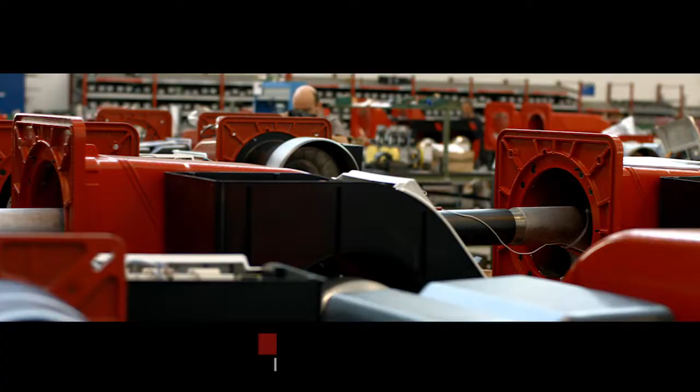Claudio Pancolini, and I founded this company in 1972 with a deep commitment to develop and produce high-efficiency burners with a low environmental impact, using gas as fuel.

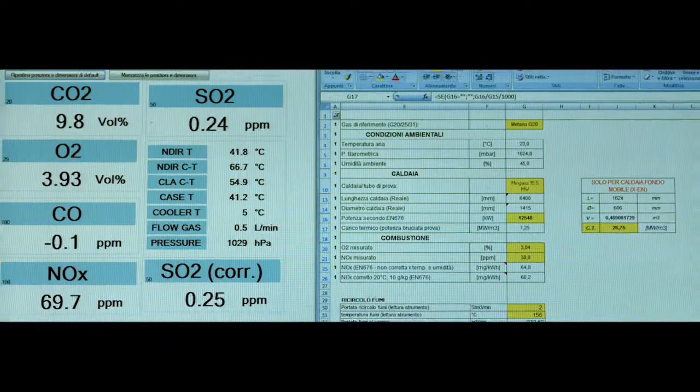After almost 50 years, many things have changed, namely the technologies and the technical solutions, but the will to discover new systems to improve the production of burners remains.

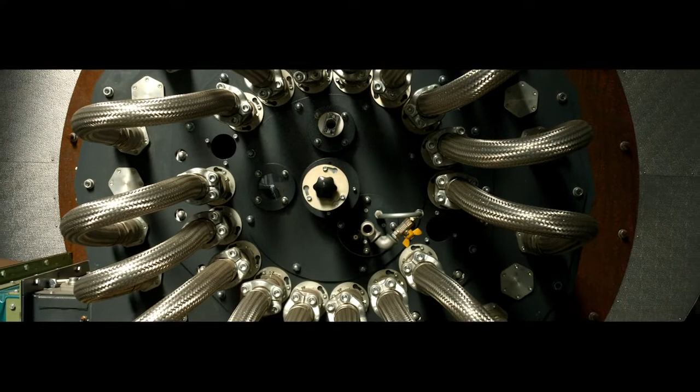More and more, efficiency and environmental friendliness is stronger than ever. The great results achieved are a result of the daily commitment of the people cooperating with me, employees, technical staff, and of my sons, Riccardo and Filippo, who work with me in the company.

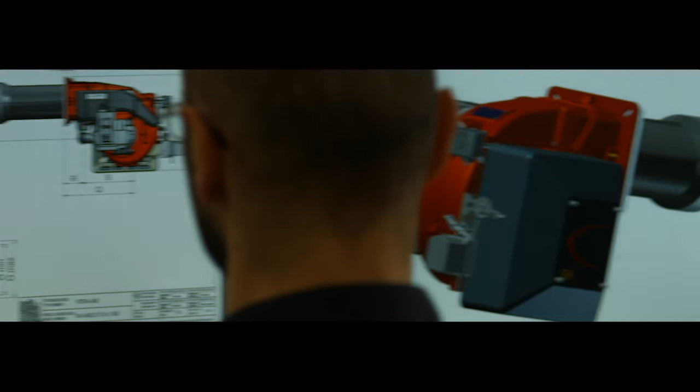Since it was founded, the philosophy of CIB Unigas in the production of burners has always been to achieve the optimal ratio between the utmost reduction of pollutants and the greatest yield of heat.

Today, CIB Unigas, still owned by the Pancolini family, produces as many as 800 models of burners for domestic and industrial use.

These burners can operate on any type of fuel, gaseous, liquid and solid, with power varying from 20 kilowatts to 80,000 kilowatts, depending on the client's requirements.

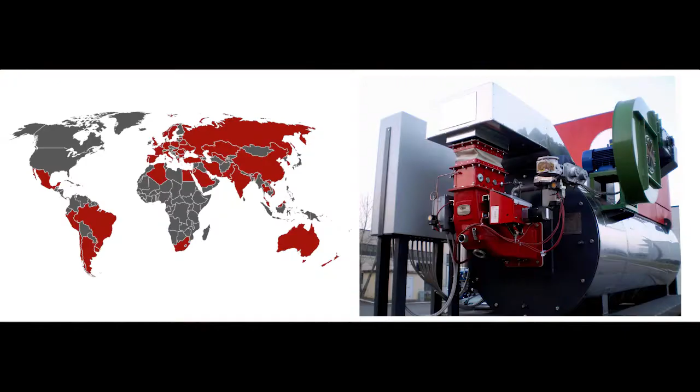In addition to the traditional burners, we have seen a continued growth in the request of special burners over the years. These burners are designed to meet the customer's specification in every detail and also to comply with the current legislation.

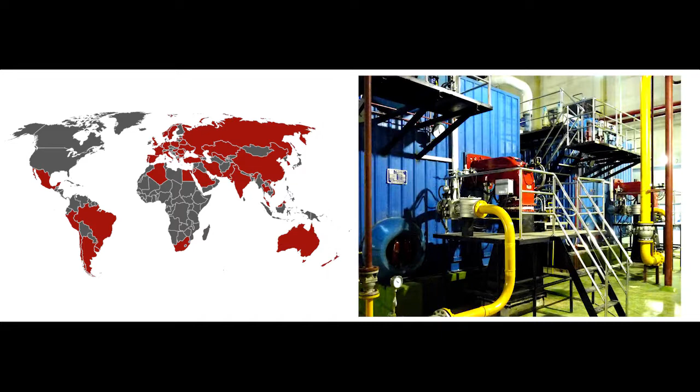They are almost always high or very high power burners with a performance to match, used in heat generation plants for industrial processes.

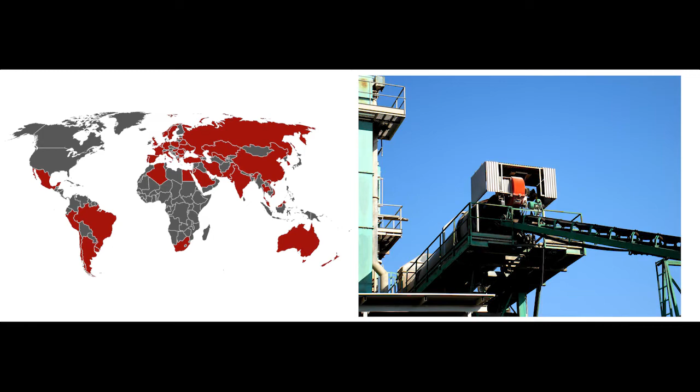We are capable of meeting the high demands of the market while safeguarding the integrity of the Made in Italy product. The company head office and R&D department are in Italy, but we have a worldwide efficient network of technicians, sales and support.

The corporate structure of CIB Unigas in Italy is made up of the headquarters in Padua, a subsidiary company in Milan for the production of special burners, and 3 factories with technical and commercial departments in Great Britain, Russia,

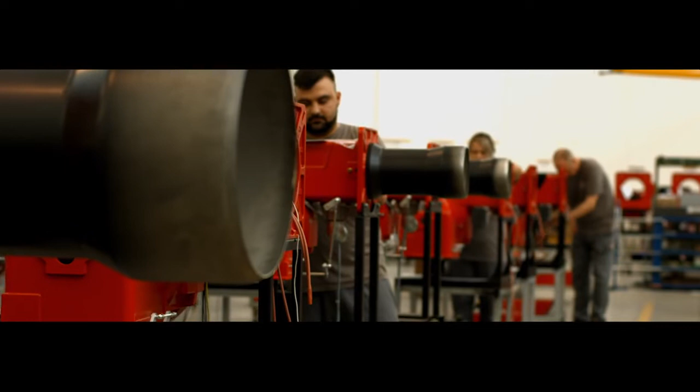More than 200 people work for the group, most at the Italian headquarters in a heavily industrialized area near Padua. Here, the entire production chain is based, where the various departments assiduously exchange all the information required for the optimal management of the orders.

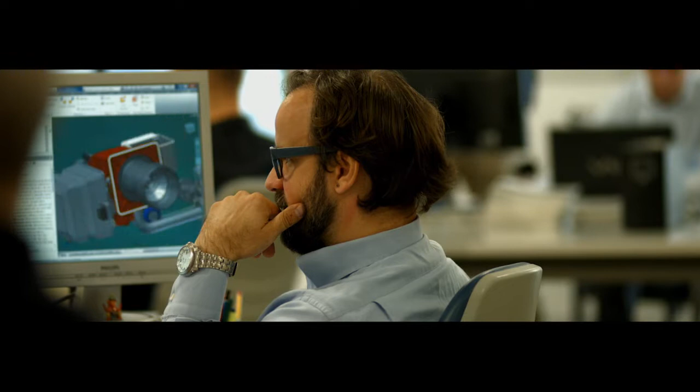Every day in this factory, designers employ great commitment and skill in devising the best solutions for turning clients' requests into reality. Once the working drawings, specifications and bills of quantities have been defined, the production process is conducted with precision.

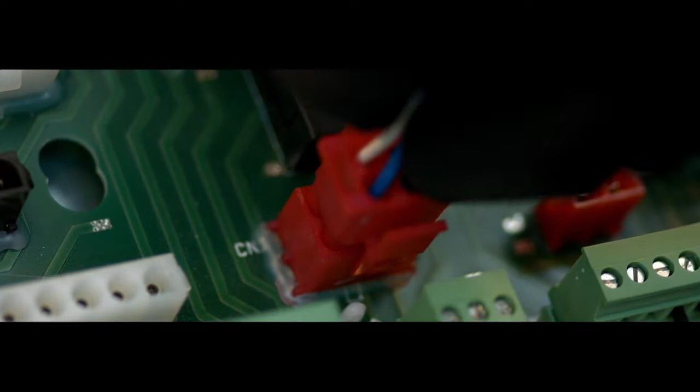Optimizing the times and resources at all stages, creating 3D prototypes, the processing of metal and structural steel, painting, software analyses, assembly of the mechanical and electrical components, testing.

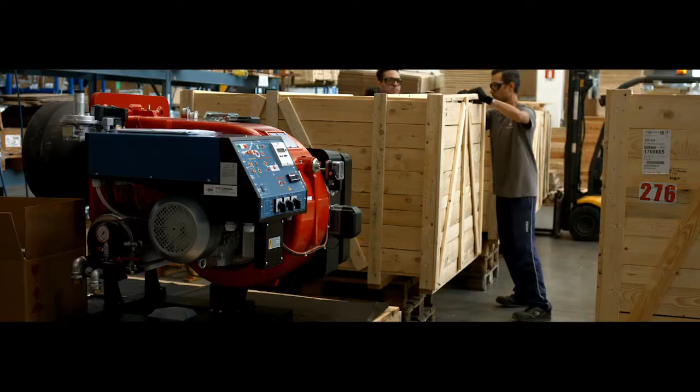This is where every burner produced is painstakingly tested and screened before being sent for shipping. Every aspect of the logistics is carefully scrutinized, from the packaging to planning the shipment of the burner to its destination.

Spare parts are always available at the warehouse to ensure the burners continue to operate for many years. The company has all the certificates required to be able to ensure full compliance with the current regulations throughout the world.

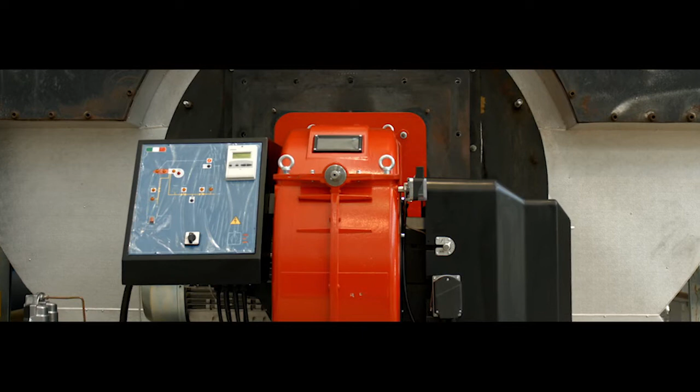CIB Unigas burners are installed in more than 50 countries by specialist technicians who also conduct the testing of the equipment, wherever it is located.

CIB Unigas's technical and commercial network is the outcome of a major organizational program that handles sales, technical consultancy, and the post-sales service.

With a truly global footprint, it is divided into areas of expertise. The headquarters in Italy is directly responsible for the technical and commercial management of around 300 sales and assistance outlets.

In the Russian Federation, China, and the United Kingdom, the group's companies are operating on the spot, overseeing the retailers and assistance centers through their own personnel.

In 50 other countries, CIB Unigas is represented by distributors, mostly under exclusive contracts, supported by a dedicated foreign technical and commercial assistance department at the Italian headquarters.

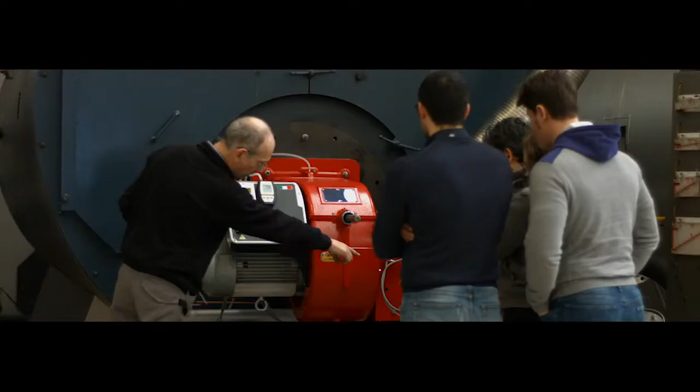All the technical personnel throughout the world who work with CIB Unigas burners are given appropriate training courses in Italy through the Educational Division, which provides training and refresher courses in the various languages of origin.

The most important hub of CIB Unigas is the Research and Development Center. Since the early days of the business, Chairman Claudio Pancalini has made research the crucial factor in the management of the company.

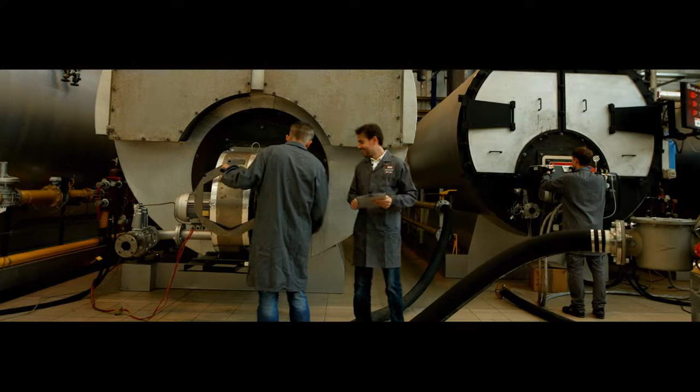Major resources continue to be concentrated in this sector, amounting to around 5% of its turnover every year.

Our technical center covers an area of about 3,000 square meters, including R&D department, technical design, prototyping, commissioning management, testing laboratory and technical training school.

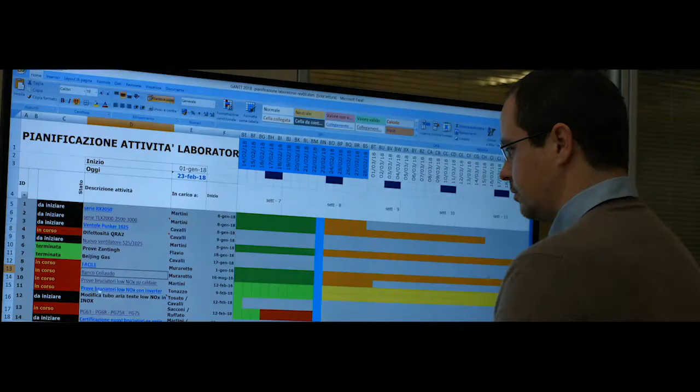Every day we are committed to finding new solutions and developing them to increase machine performance, with particular regard to containment levels of pollutant emissions, sound emissions, and energy efficiency optimization.

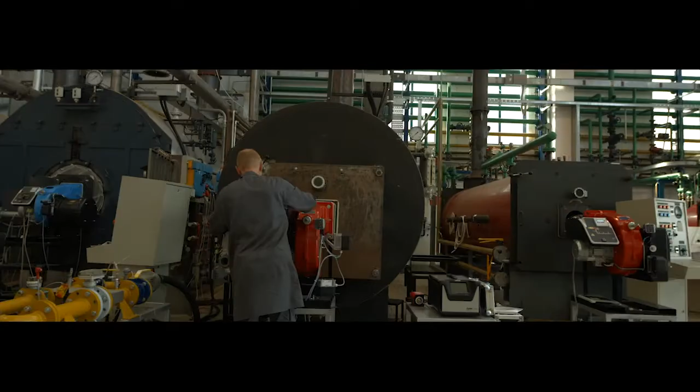Our research and development department is without doubt one of the largest and most advanced in Europe, within which, in the test laboratory, 16 boilers of various sizes and specifications are engaged in tests up to capacity of 35 MW on all types of fuel.

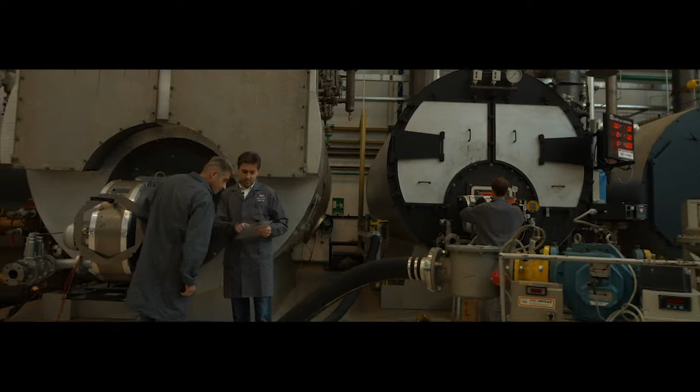The technical hub employs 30 engineers and technicians who specialize in the field of combustion. Careful planning is conducted to ensure strict technological and qualitative standards, making combined use of software applications for structural simulations of fluidodynamics and combustion.

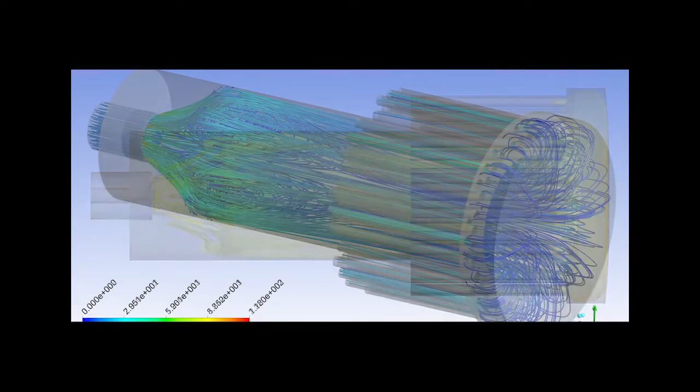And using models rapidly built as prototypes as well as laboratory tests on samples.

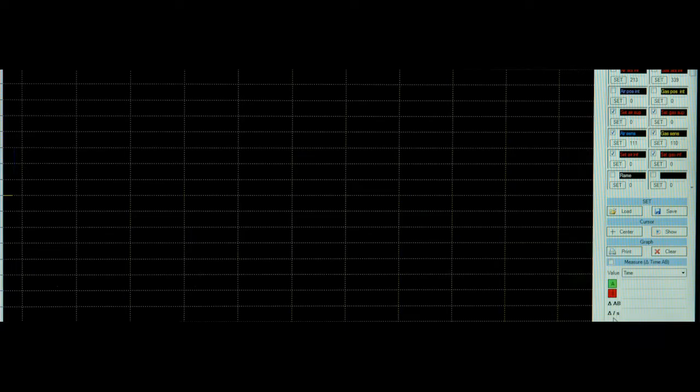In recent years, we have developed a completely innovative system that greatly simplifies the commissioning phase by entirely automating the burner adjustment on the plant and ensuring an optimal range of combustion during its entire operation.

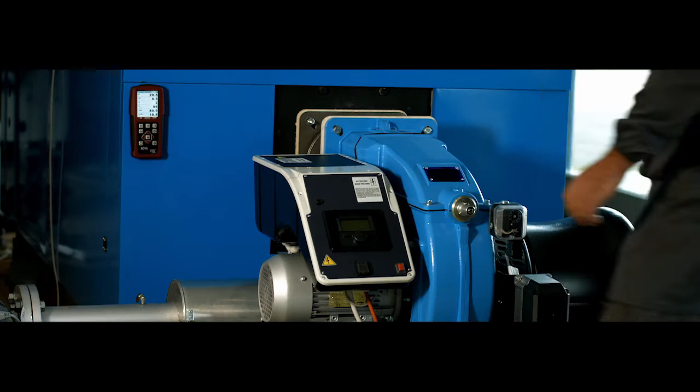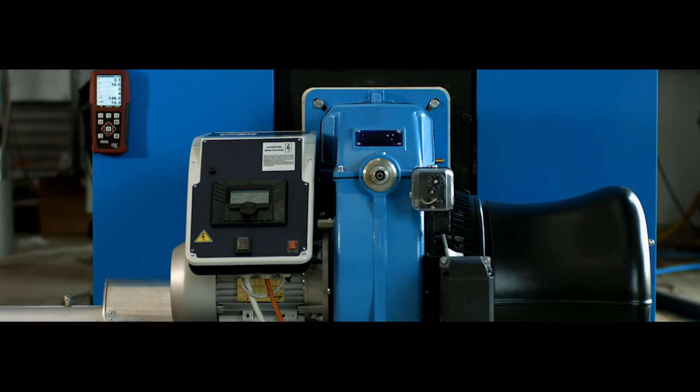This system, emblematically called Facile, also enables the environmental and equipment variations that occur during operation to be monitored, autonomously changing the regulation of the actuators in order to always return to optimal combustion conditions without the need for feedback from chimney probes.

Facile has already become a reality and is now available in some models of our burners.

CIB Unigas burners can be found in every situation throughout the world where it is important to produce heat: hospitals, industries, airports, shopping centers, hotels, sports facilities, major residential complexes, refineries, stations, and schools.

These are places where it is not always easy to produce heat, and where the certainty of a constant supply in the right quantity means well-being, work, and life.